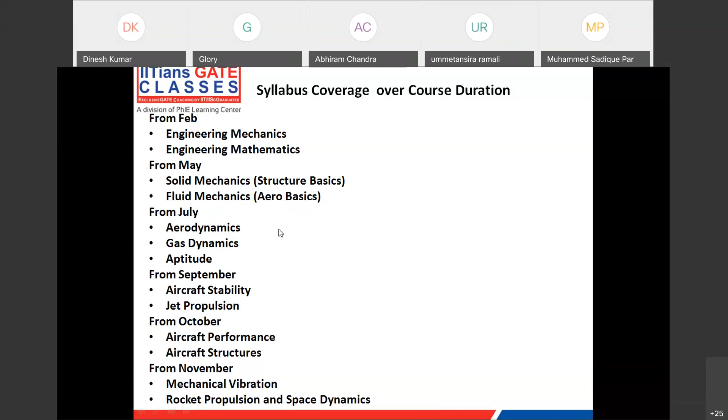Yeah, so these are the links for our sample work. We have shared these links multiple times with you guys. You can go through all these links, like our sample material, assignments, sample online exam, sample videos on YouTube. We have many good videos on YouTube, like the opportunities or future of aero students, the importance of GATE aerospace for aerospace or aeronautical engineering students, subject-related videos, previous year's paper solution videos, or topper talks on GATE preparation. There are many good videos, so you can watch and get motivated.

In terms of the test schedule, see, test is like this. Suppose we are teaching engineering mechanics. There are two parts in engineering mechanics: one is statics and one is dynamics. So we have exams for both. It is not hard and fast that you sit at that particular time and write. Topic-wise exams you can write once due, anytime, anywhere. But it is always good you complete them early when exams are due. We will notify when exams are due. Is it okay, Glory?

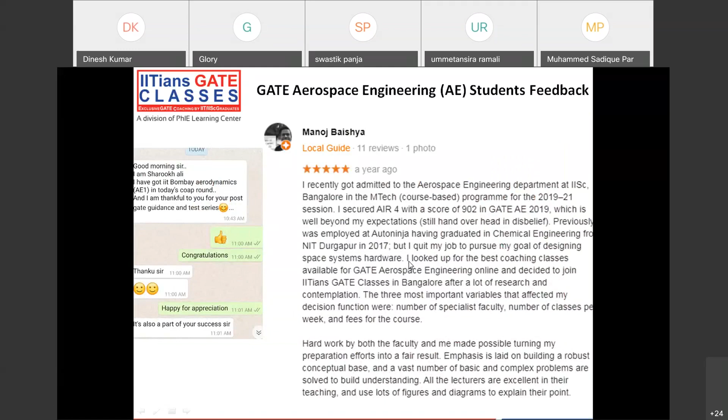Now, these are a few feedbacks from our previous students that we have shared with you guys. You can see the kind of work we provide. So this is Megha Bhardwaj. This feedback is way before she got All India rank 2, right? The result came in 2019 and she provided feedback on 10th December 2018. Before that, she took classes from somewhere else. 1 year she wasted. Now read this, because some institutes claim her result.

But you read, because of the kind of effort we put in mentoring students, it's not about whether you are just our class students or our DLP or test series students. Is it clear, guys? So we do not claim the result of any students unless they are our students and they get support from us. Even many people attended our online mock exam freely. We don't bother; whatever result they get, it is their preparation. We will bother about the results of all our students who have registered and paid. The same thing will be there for your batch as well. Clear, guys?

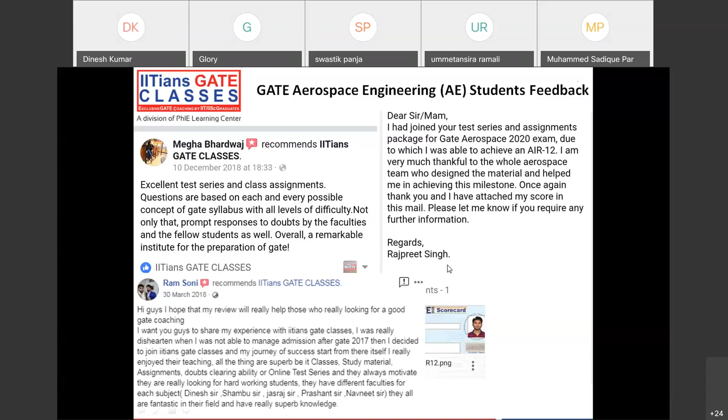So these are a few more feedbacks you guys might have gone through. Yeah, now this is the doubt forum. So you can see someone has inquired. You can see here the doubt posted and the support either by IGC, meaning our faculty, or GATE, meaning the student fraternity. Clear?

So these are further doubts. You can see here, this is for basic fluid thermodynamics. There also we provide very good support. Now you can see this is post-GATE guidance. Once you have a rank, how to use that rank in the best way, we provide complete support for that as well. Is it clear? Yeah, fine.

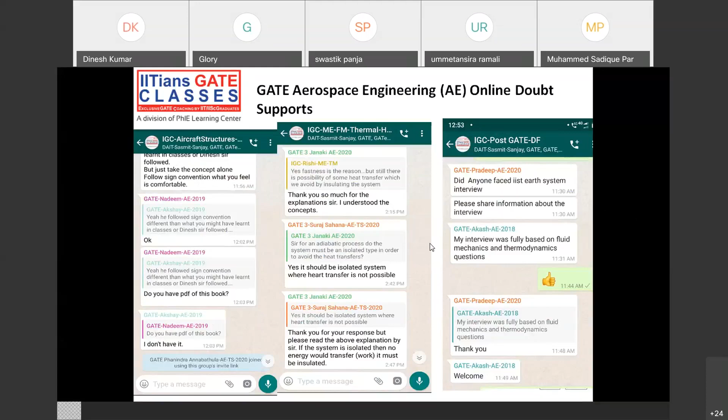Or any topic like mathematics, linear algebra, differential calculus. We are the only institute providing exams in such a systematic manner. If you take gas dynamics, we have exams even for Rayleigh and Fanno flow. We have an exam for CD nozzle. That will make sure you are good in every topic. If you are good in every topic, then the whole syllabus will be easier.

Okay, you of course will be good in the whole syllabus. So after all those topic-wise exams, which should be completed by November by every student, we have subject exams. So for every subject of GATE we have an exam, like aerodynamics, gas dynamics, engineering mathematics, propulsion, like this. And now we are having around 20 subject-wise exams here. Not all the exams are listed. Okay, and then we have 4 module exams and 10 full-length exams.

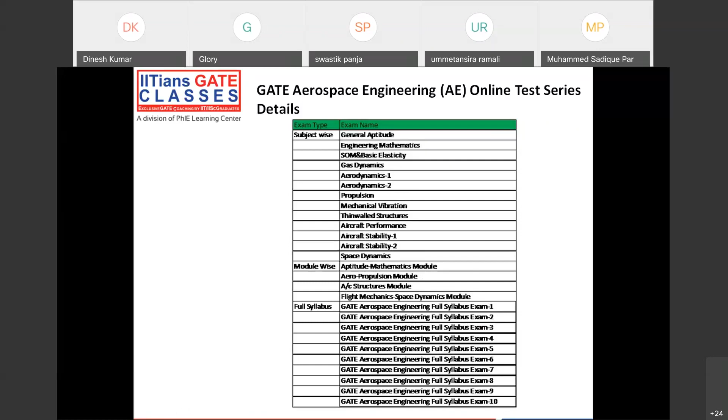And you will find all 3 kinds of questions, which is NAT, MCQ, MSQ. All 3 kinds of questions we put in our exam. And we are very fortunate, GATE 2021, as I told, was exactly like our IGC mock exam.

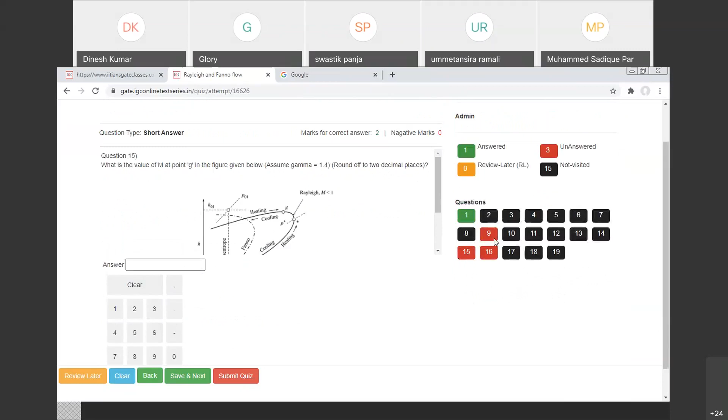suppose this topic is covered, you can see this is MSQ questions, multiple choice, multiple answer. This is the latest GATE pattern questions. This is NAT, short answer. This is again NAT. This is NAT. This is a MSQ. This is MSQ, short answer. So all these questions are there.

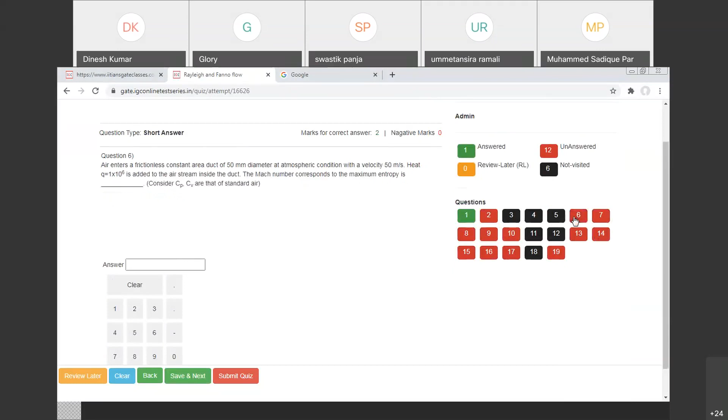You can see short answers. So a lot of numericals are given. This is a MSQ. So like this, different types of questions are given. Here, if you see, the virtual calculator is there, so you can quickly use this like GATE. It is very quick, it is not slow, and it is inbuilt.

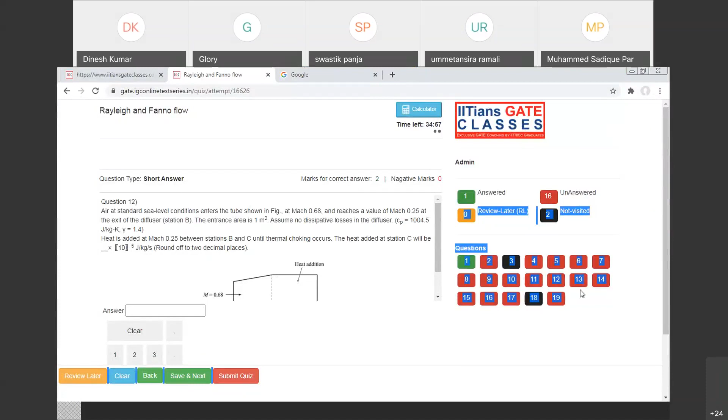You can see here time is running. Time will fly, so that is also important. So all these features of real GATE are taken care of. You guys can tell, I can give the answers.

So what is Abhinav Chandra? What is your name? Abhiram Chandra. So this is like GATE, right? You have written the GATE exam.

So analysis, everything will be shown. Once you submit the exam, in GATE the result takes time, right? But this will not take time. Immediately it will tell. So I have attended two questions which were MSQ. You can see incorrect, but still no negative marking, because for MSQs there is no negative marking. Here you can see what is your rank, who all have attended, how much time you have taken.

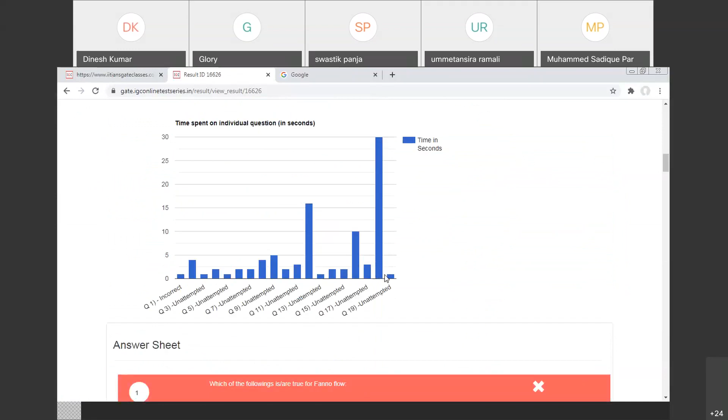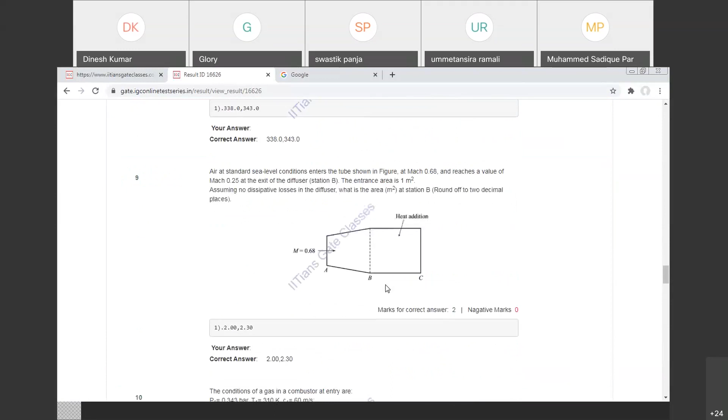So like this. Now when we have subject exams, for the initial few exams we categorize by subject, so you can analyze which subjects you are poor in and which subjects you are good in here in category. But later on, like in your GATE exam, there will be only two categories: one is aptitude and one is core. So we will not categorize into more subjects. So in the initial exams you have to analyze where you are weak and where you are strong.

So here the results are always available, and as I told, in mock test you will find all the mock tests. If you take the full length exams, you can see the 10 full length exams. Clear? Now if you want subject exams, just filter module wise or subject wise. You can see all these subject exams are there. In subject exams and topic wise exams, we don't keep 65 questions. Questions will be sometimes 25, 20, 30, 40, like that. It varies.

We give only a soft copy at the beginning, but for that you have to pay a minimum amount. It will be one time sharing through Google Drive. Every time we will not share. Whatever we teach in online classes, there will be a separate drive where class notes will be kept if it is required. Okay, fine. So this is about the online test series tool.

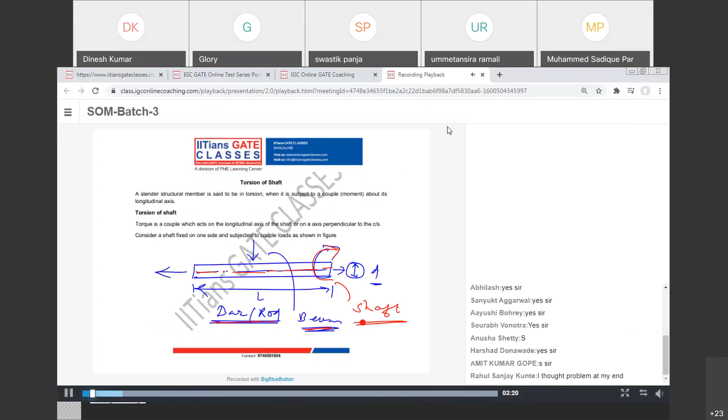What I need to explain? Yeah, I'll tell quickly, then we'll start the demo class. So you guys can see this is how the recording will be there. Okay. Yeah. So this is about IGC platform. I'll close it. Yeah. You are asking something? What you are asking?

In 1 week there will be 2 classes only? No, no. There will be 4 to 5 classes. Abhishek, that's what I was saying about the IP part, like you cannot share credentials with a friend. Okay. You have to use it for yourself. Okay. Because it's online. It should not be like just share with anyone. Otherwise, we will limit a lot. Okay. It should not be misused. Clear?

That is a separate team, IT team. Okay, I don't do it personally. It is shared data from the IT team. Okay, clear? Yeah, I think so. I think I have done from my part, and we'll move to the technical part. Okay, before that, you guys can go through our sample materials and all. All the links are provided. So, Nithin sir, are you there? Yes, sir. So I'll share the presenter with you. Sure.

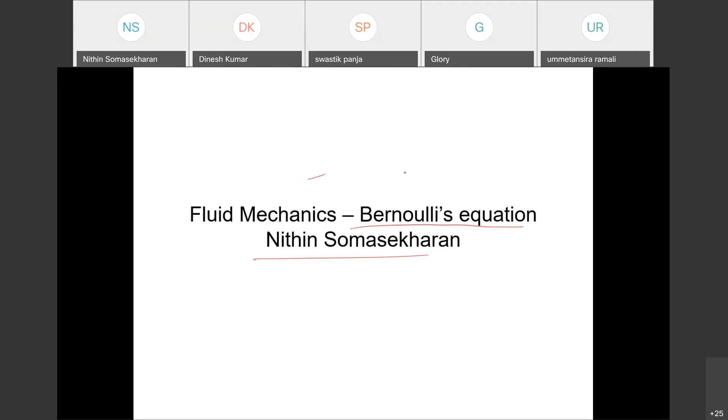So one thing which I want to discuss is just a brief background about what this Bernoulli's equation is, and I'm sure most of you have come across the term Bernoulli's equation, and you would have also seen that it is very much applied, and from a GATE point of view as well, there are a lot of questions you can expect, and every year it repeats.

From one point of view, you might think that it's a really simple equation, and then it's easy marks, and that's pretty much true. Any questions related to the Bernoulli's equation are just easy marks. You have this equation, you understand the question, you apply it. It's just pretty straightforward. So I wanted to use such a simple concept for this demo class, just to give an example to you guys.

So one thing is that it's a special case of the momentum equation, and you guys know that the momentum equation is a law, that is Newton's second law applied to a control volume. So Bernoulli's equation is pretty much a special case of it. What I mean by special case is that when I put some assumptions on top of my momentum equation, which is a law that every fluid flow must follow, I get my Bernoulli's equation.

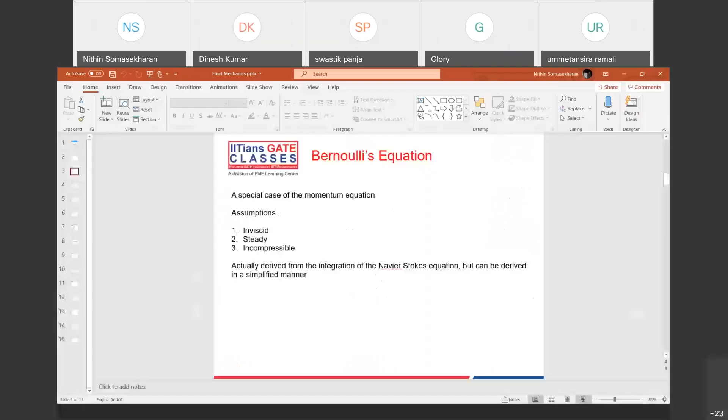All right. Great. So let me start annotating, and if I see like I can erase it.

Great. Okay. So when I talked about the flow being inviscid over here, what I mean is that, I'm not saying that viscosity will have no effect on your flow field, right? As you guys would have heard of, your viscosity can in fact create these boundary layers and things like that. In fact, let's say you have a flow over a flat plate, it can pull down your velocity close to the body to be zero, and then away from the wall to be of some higher value and things like that.

So when I'm saying that the flow is inviscid, or assuming the fluid to be inviscid, I'm saying that I'm going to ignore these effects. I'm going to ignore the effects that my viscosity would bring in. That is, my fluid flow is not going to be retarded because of the presence of the wall, or there is not going to be any rotation in my flow field. Let's say you have a fluid element, and your fluid element is basically getting rotated because of the viscosity and things like that. So none of this is going to happen, or I'm assuming that none of this happens,

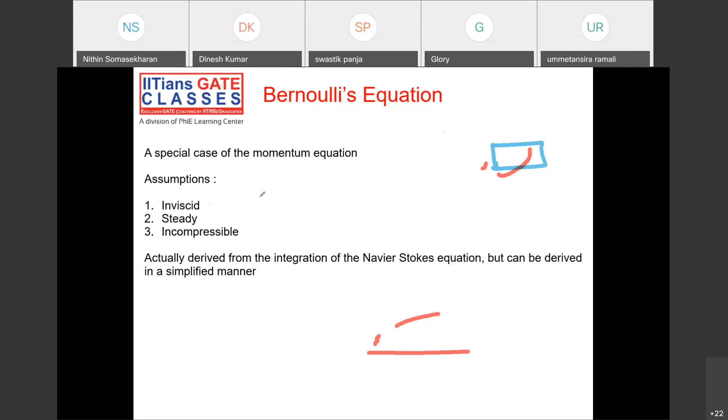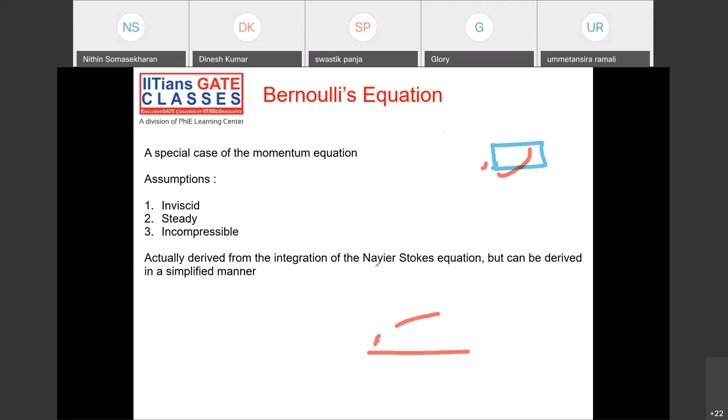in my flow field. So that is basically what the inviscid assumption means, meaning that no effects of viscosity would be considered in my flow field. Viscosity cannot have any effect. Even if there is a wall, there's not going to be any boundary layer, there's not going to be any rotation, nothing like that. It's just going to be plain and simple. All right? Is that clear?

All right. So the next assumption being that, what kind of approach do we use here? So we use an Eulerian kind of approach, not Lagrangian. Whenever we do any derivation from a fluid mechanics point of view, we rarely use the Lagrangian approach, because that is very complicated, in which you have to track each and every particle, which is not that easy. While the Eulerian approach gives you a wider picture, a bigger picture in a much easier sense.

So let me get my chat box out. "So how come we go with Navier-Stokes equation here, sir? Please do not laugh at me." I mean, it's okay. No questions are stupid, so it's fine. You can ask, even if it's a very basic question. It's always entertainable. How come we go with Navier-Stokes equation here?

So we do not go for any Navier-Stokes equation right here. If I go forward in my derivation, you can see that I'm not going to use any Navier-Stokes equation. Absolutely not. We are going to derive it from a much simpler formulation. The Bernoulli's equation can be derived from the Navier-Stokes equation, and that is the right way, or the most mathematically rigorous way. But here in this case, we are not going to do that. We are going to go for a much simpler approach, just for the sake of this demo class.

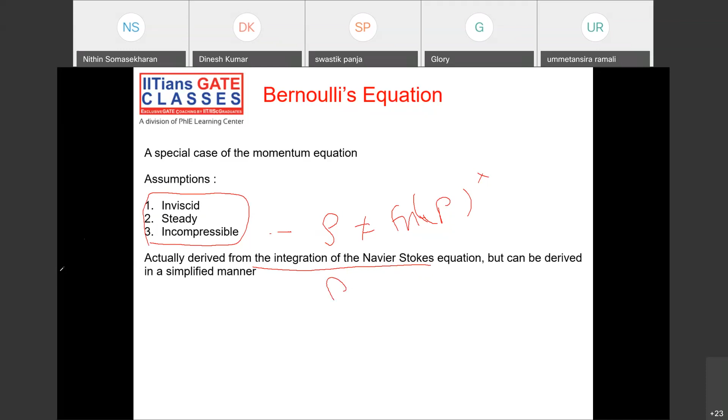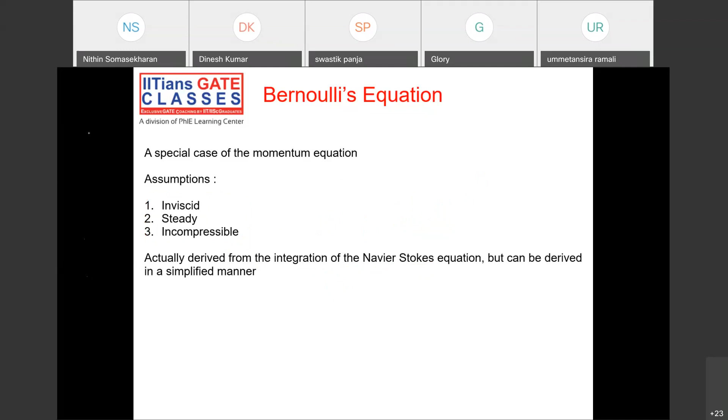Great. So let me move ahead in my presentation. All right. So for this derivation, I'm going to take a streamline in your flow field. You know that a streamline is basically a line that gives you the direction of your fluid flow. So you have your streamline right here, and it gives you the direction of your velocity vector in your flow field. It's one of the basic concepts, right? A streamline.

And what I'm going to do is take a control volume around it, which is basically nothing but the Eulerian approach that I had mentioned, that you would assume a control volume while doing something in the Eulerian space, right? So I'm going to assume that there is a control volume around this, and it's a cylindrical control volume, as you can see in the figure. We are going to apply our equations of motion on the cylindrical control volume, and finally we're going to derive Bernoulli's equation.

So keep in mind we have a streamline, which gives you the direction of the flow, and on top of the streamline I'm going to assume that there is a cylindrical control volume. And control volumes, as you would know, are certain small volumes that you assign in your flow field so that you can derive some of your laws. Any questions?

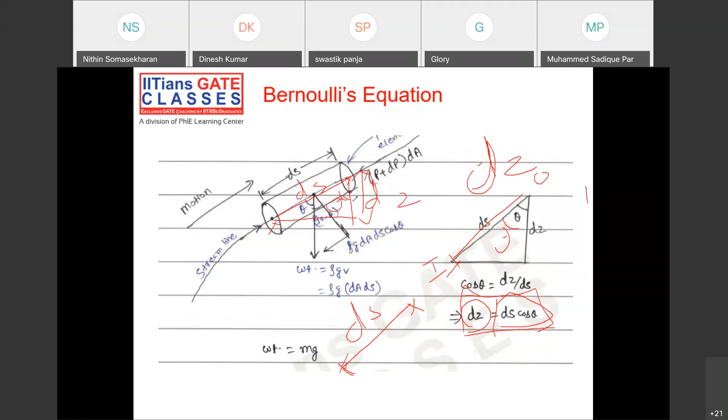So the vertical height difference dz between the inlet and the outlet. So this is the inlet, this is the outlet. So this is a vertical height difference, vertical in the sense with respect to the direction of gravity. And if this is ds and this is theta, so dz from the triangle, you can see that it's ds times cos theta.

All right, is everything clear? Shall I move ahead, or are there some questions that you guys have which need to be answered? Any questions? Are things clear? Am I going at the right pace so that you guys can understand? I know that some of you guys might have your concepts rusty. So am I going at the right pace, guys? Great. All right. So let me move ahead to my next slide.

DZ and W are in the same direction. Yep. DZ and W are in the same direction. Yep. All right. So let me move to the next slide. So here is where the mathematical beauty happens. So now we are going to sum up all these forces that I have identified, right?

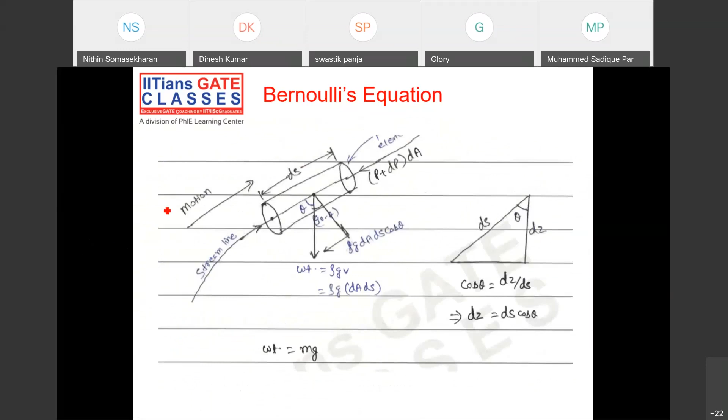I have PdA. Oh, sorry. Let me go back. Let me see if I'm able to annotate. Oh, this is crazy. Sorry guys for this technical hiccup, it's just crazy. Let's see. All right. Oh no, again. It's fine. Let me see. Okay. So let me try to make this right, guys. For some reason, I'm not able to annotate all of a sudden. Okay, nope. All right, so we are back, guys. Sorry for that hiccup.

So now what we are going to do is sum up all these forces. So assuming that the direction of the streamline is the positive direction, we have identified some forces, right? PdA at one end, and here P plus dP times dA in this area. And then you have the component of your weight, that is rho g dA ds cos theta. So we are going to sum up all these forces.

So PdA, is it in the positive direction or the negative direction, guys, according to the convention that I just mentioned? PdA, the pressure force acting at the inlet. Positive. All right. And P plus dP times dA, since it is against the direction of the streamline, is going to be negative. So here you can see PdA positive, and this is negative of P plus dP times dA. So you have negative PdA, negative dPdA. So it's in the opposite direction, guys.

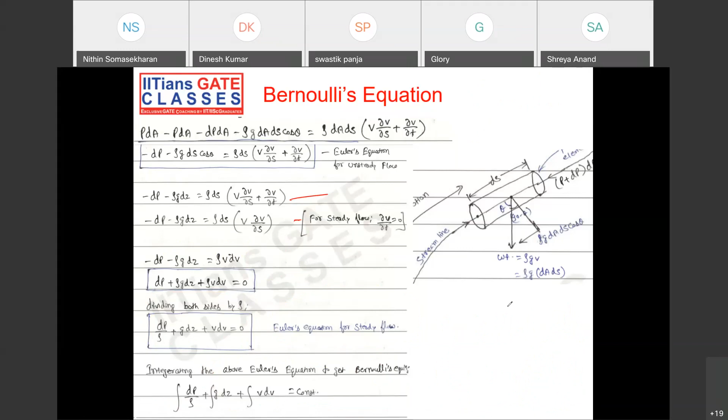Use your usual integration; it's like integral of x dx, so that's v squared/2, right? So in the end, we get our Bernoulli's equation. Let me open the next slide. The expression I just showed you: p/rho plus gz plus v squared/2 is equal to constant, which is the final form

of the Bernoulli's equation. Each term represents energy per unit mass. p/rho is pressure energy per unit mass. gz is mgz, potential energy divided by mass, since z is the vertical coordinate. Half mv squared is kinetic energy, so per unit mass it's kinetic energy per unit mass. Pressure, potential and kinetic energy per unit mass sum to a constant for a flow that is steady, incompressible and inviscid. This is our powerful and simple Bernoulli's equation.

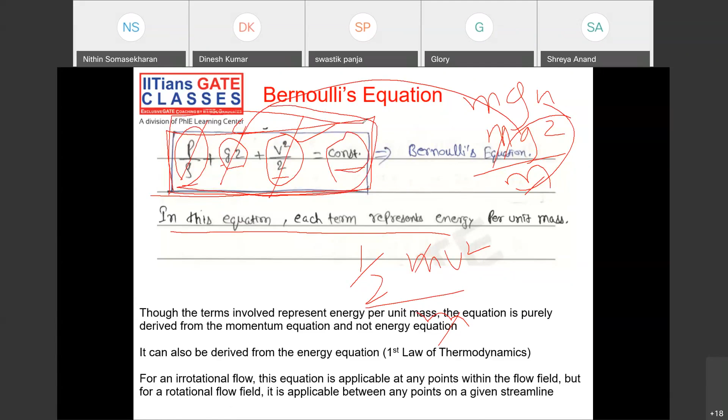All right. Any questions, anybody? Any questions? All right. A few comments, and please feel free to bring up any.

Keep in mind, this is not the right way to derive Bernoulli's equation. It just does the job for us. The right derivation is much more rigorous, has a lot of mathematics involved, and you would derive it from the Navier-Stokes equation.

And that is up for a detailed lecture that we always do with the class students. So this is just to give a context on how we teach.

All right, and another important aspect to keep in mind here is that though these guys represent some kind of energy per unit mass, this equation is purely derived from the momentum equation and not an energy equation. So you should never think of the Bernoulli's equation as an energy kind of equation. Though it represents some form of energy, it's not necessarily that it can only be derived from the energy equation. And as I mentioned, you can also derive the same from your first law of thermodynamics, that is your steady state energy equation for that matter.

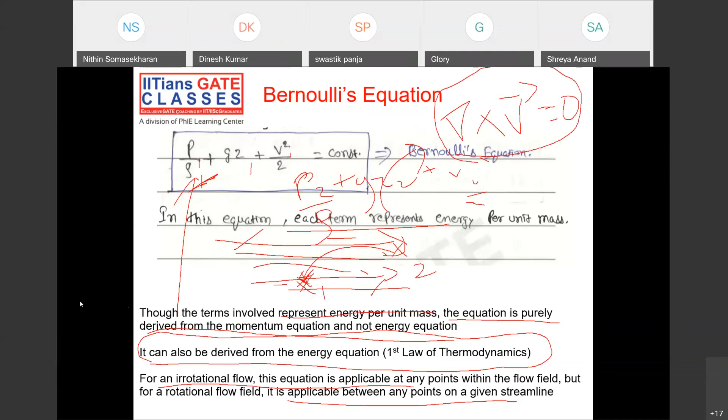So I can apply Bernoulli's equation between point 1 and point 2, and these points 1 and 2 can be located anywhere in my flow field. It can be here and here, here and here, anywhere. Doesn't really matter. And this is only for a flow field where this condition is true: your flow field is irrotational. That is, your vorticity is zero at every point.

But if it is a rotational flow field, your Bernoulli equation is still usable, but only at any 2 points on a streamline. Let's say you have streamlines of a flow field given by this. So I can apply it between any 2 points on a streamline, point 1 and point 2. Let's say I have points 3 and 4 here. I can use Bernoulli's equation between these 2 points. I cannot use Bernoulli's equation between point 1 and 3 if it is a rotational flow field. All right. So this is one important aspect that you guys need to keep in mind when you deal with Bernoulli's equation.

All right. Are those details clear? Any questions, anybody?

All right. So is Dinesh sir online? Sir, I'm there. Yes, sir. So do we have time, sir? You can take up one question. Okay, sir. All right. Sure. But try to wind up quickly, 5 minutes. Sure, sir. Then we'll have a break. Yeah, sure.

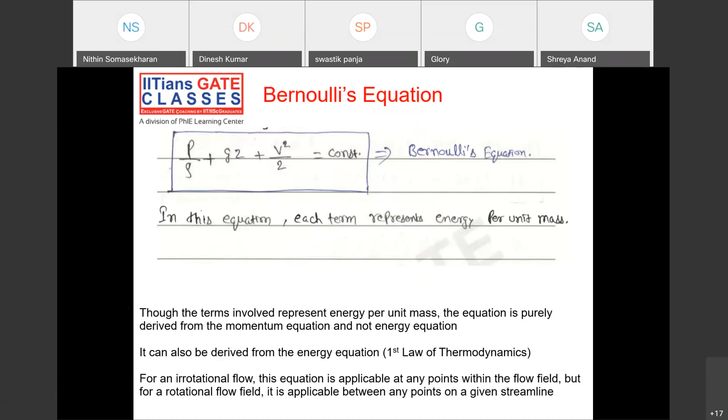Sure, sir. So let me move to a previous year GATE question to demonstrate the same. And this is a very simple question. And you guys would already know that the Bernoulli's equation can be applied to a pitot tube. A pitot static probe is nothing but something which you typically use to measure the velocity of your flow field.

That is, let's say you have a flow field here, and you immerse this pitot tube in this flow field, and you have ports on your pitot tube that measure the static pressure, P static, and ports that measure the total pressure, P naught. So you know that the Bernoulli's equation can be applied in such scenarios as well. So P naught will be nothing but static pressure plus rho V square by 2. That is, if I take 2 points over here, let's say I take a point inside this stagnation, the place where your flow field is going to be decelerated to zero velocity.

So we know that the velocity here is going to be zero with some pressure, let's say P naught, which is nothing but your total pressure. And you have these static ports which measure the static pressure, which I call PS, and the velocity over here is nothing but the velocity with which your flow is coming in, V infinity. So I can definitely apply my Bernoulli's equation between these 2 points in the flow field, as long as my flow field is irrotational.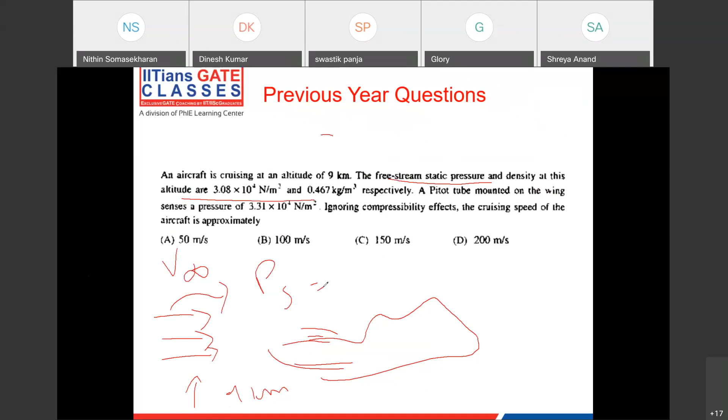The free stream static pressure and density at this altitude are given. So the static pressure of the air at this altitude is 3.08 into 10 power 4 Pascal. For the density, usually we represent any property of the free stream, the incoming flow which is undisturbed, with a notation of infinity.

So P infinity is nothing but the pressure of your free stream, given as 3.08 10 power 4, and rho infinity, the density of the free stream, is given to be 0.467 kg per meter cube. And a pitot tube mounted on the wing senses a pressure of 3.31 10 power 4. We know that the pitot tube measures nothing but the total pressure, the P naught, which I mentioned in the previous slide.

The total pressure is the pressure that your sensor will detect if the flow has been brought to rest, if the velocity is brought to 0, and that is 3.31 10 power 4. Now the question is, ignoring compressibility effects, what is the cruising speed? We need to find V infinity. Keep in mind this point, ignoring compressibility effects.

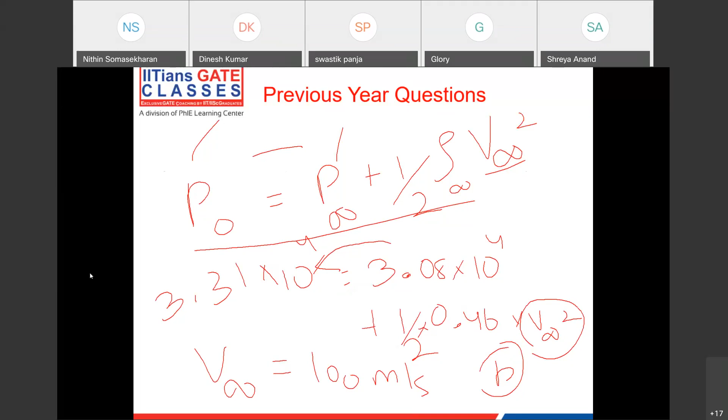And one thing which I want to reiterate: they told me that you can ignore the compressibility effects. If I were to consider the compressibility effects, I definitely can't use Bernoulli's equation. I will have to use the gas dynamics equations. You might be aware of P naught by P is equal to 1 plus gamma minus 1 by 2 M infinity square, whole power gamma by gamma minus 1, and things like that.

So whenever they ask you to consider the compressibility effects, you have to go with the gas dynamics formulas. And if you go by gas dynamics formulas, your V infinity will be much different from what we calculated here. Just because they told me I can ignore the compressibility effects, I went with Bernoulli's equation and did this quick calculation. So keep this in mind. This is usually a place where people make a lot of mistakes.

It's very easy to ignore this intrinsic detail, but make sure you have this concept in mind: I can only apply Bernoulli's equation in this particular form, P by rho plus gZ plus V square by 2, if I'm ignoring the compressibility effects, or let's say my flow is incompressible. If compressibility effects are to be taken care of, then we need to deal with it in a different way. All right. So that is one easy problem I wanted to share with you, and an interesting detail that can be very much overlooked.

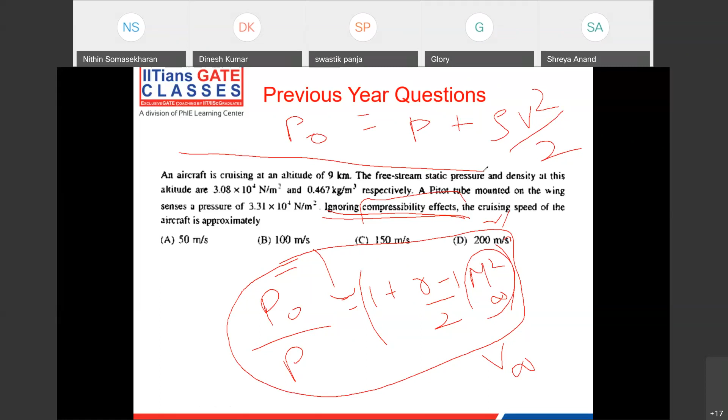So any questions here before I conclude? Any questions before I conclude?

All right. So this is pretty much the format in which we conduct the class, at least for aerodynamics: we talk about the derivation, the theory, any intrinsic details, the actual physics involved, and then we do some problems related to it, mostly previous year GATE problems, and then any other questions you might have. And I hope I was able to give you a sense of what you can expect in our classes.

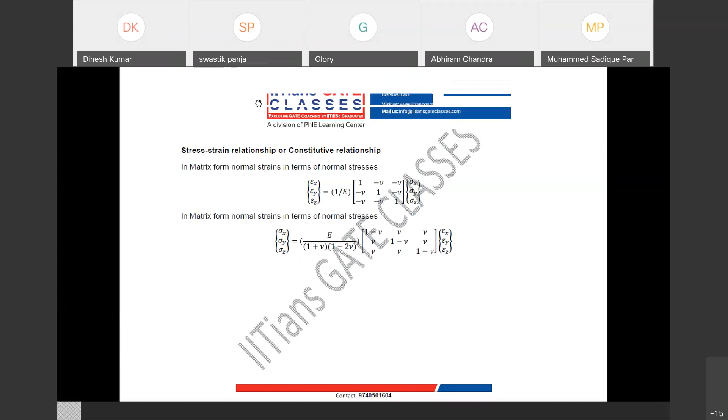Okay, so let's start with a simple topic: stress strain relationship. How many of you are aware about the stress strain relationship, guys? All of you know Hooke's law. What is Hooke's law, guys? Yes, stress is proportional to strain, right? Like sigma is proportional to epsilon.

But where is it applicable, guys? It is for 1D loading. Am I correct? From here we find sigma is equal to E times epsilon, right? So what is E here, guys? We are talking about the stress-strain relationship for isotropic material, because from this simple concept they have asked questions many times. Yes, Young's modulus. It's known as Young's modulus or modulus of elasticity. But as I said, Hooke's law is applicable only for 1D loading.

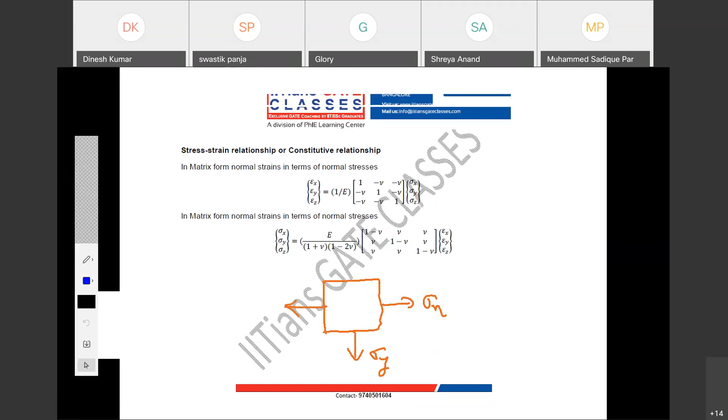Now suppose you have two-dimensional or three-dimensional loading. Then tell me, can we apply Hooke's law? Can I say my stress is directly proportional to strain? Anyone? Abhiram Chandra. No, you cannot, right? I will take one two-dimensional case. Suppose I have one plate subjected to stresses sigma x and sigma y. So it is a two-dimensional stress system. Now in this case, tell me, guys, what will be your strain?

I want, suppose, epsilon x. Will it be sigma x upon E? From Hooke's law, this is what your strain should be. But is it the case? Anyone? Yes or no? No, it is not the case. My strain will be sigma x by E minus nu times sigma y by E. So there is one additional term, which is due to my stress in the y direction causing strain in the x direction. Due to what? Poisson effect. Is it clear?

Due to the Poisson effect, I have one additional strain in the x direction due to loading in the y direction. Now tell me, guys, why is it negative? Why is it not positive? Can you understand physically? When I apply sigma x, it will get extended, so strain is developed. Now sigma y will oppose this extension, meaning contraction. So your strain is reduced when sigma y is present. That's why you see a negative sign here. Is this point clear?

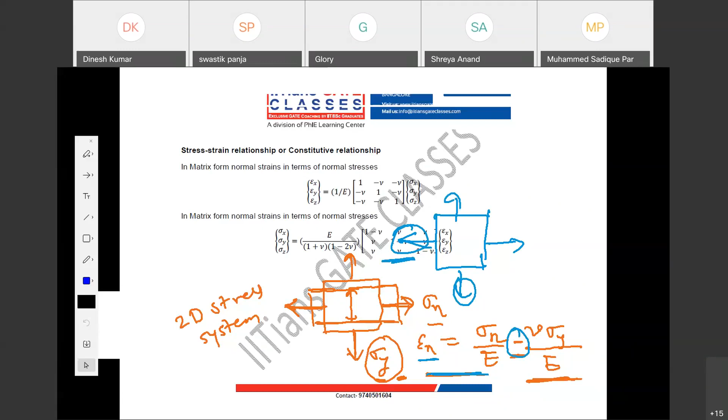So physically also we can understand: when a plate is subjected to stress in two directions, the strain in one particular direction will be less than if it were subjected to 1D loading, because this stress is restricting motion in the x direction. That is our physical understanding of why the negative sign is present. So this is how we derive the stress-strain relationship for a 2D stress system. This is your epsilon x. Now what is your epsilon y? My epsilon y will be sigma y by E minus nu times sigma x by E. Is it clear?

Is it clear or not, guys? Quickly tell. See, guys, be interactive, okay? We are online, but still interaction must be there, okay? That's how we enjoy, okay?

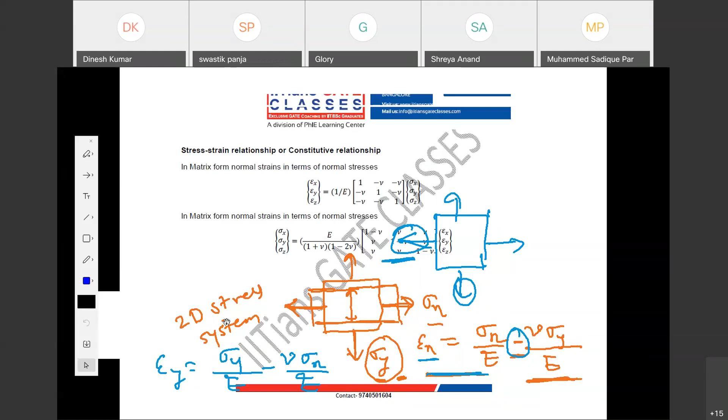So good. Now, this I talked about two-dimensional stress system. Now, suppose my stress system or my loading is three-dimensional, right? If my loading is three-dimensional, that means I have sigma x, I have sigma y, and I have sigma z. How can I visualize it? I take a cuboid. So suppose here you have sigma x, here you have sigma y, and on this face you have sigma z, right? Is it clear? The loading part, is it clear, guys? You have one stress in x direction, sigma x, I can write here. Then you have sigma z and you have sigma y.

Right. So in this case, what will be your epsilon x? It will be sigma x by E. Then due to Poisson effect, you have minus nu sigma y by E minus nu times sigma z by E. Is it clear? Is it clear or not, guys? Then similarly, I can write epsilon y, which is what? Sigma y by E minus nu times sigma x by E minus nu sigma z by E, and then I can write epsilon z, which will be what? Sigma z by E minus nu sigma x by E minus nu sigma y by E. Is it clear?

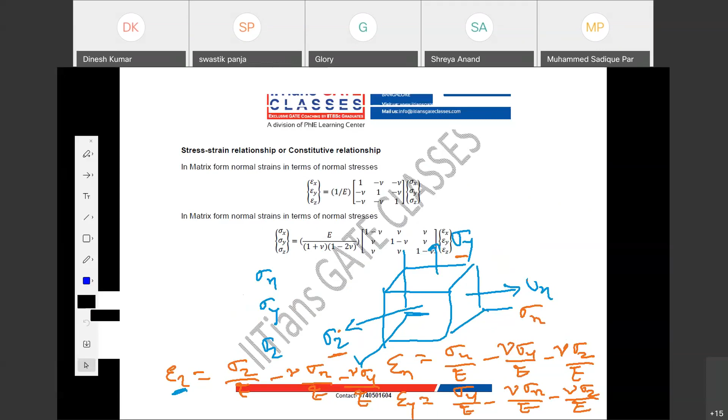So I have three strain terms, right? Epsilon x, epsilon y, epsilon z. I can write these three equations in a matrix form. Is it clear? 1 by E can be taken out. So it is what? 1, minus nu, minus nu; minus nu, 1, minus nu; minus nu, minus nu, 1. Is it clear? Nu or mu is what? Poisson's ratio. So this form is easy to remember. In matrix form, we can easily remember. And in this form itself, in GATE 2020, they asked a question. We will solve that question.

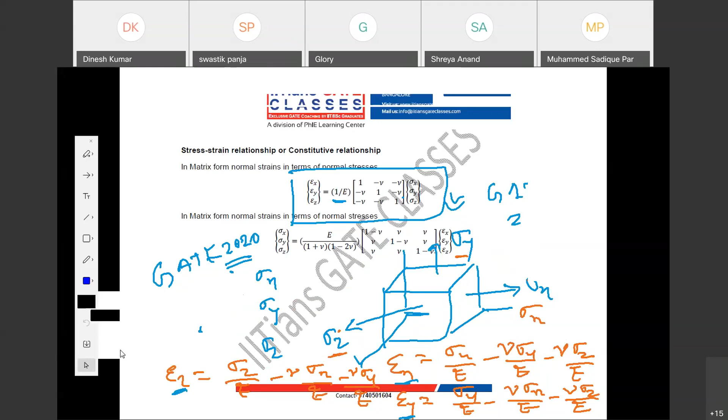Clear? Okay. Now, guys, here what I have done, I have written my strain in terms of stresses. You can write stress in terms of strain by taking the inverse of this matrix. So both the forms are very important to remember for the GATE exam. In this, it is 1 by E. Here, my constant is E upon 1 plus nu into 1 minus 2 nu. Then it can be remembered because again, it's a symmetric matrix: 1 minus nu, nu, nu; nu, 1 minus nu, nu, like that. Okay, so these are the two equations for stress-strain relationship and strain-stress relationship.

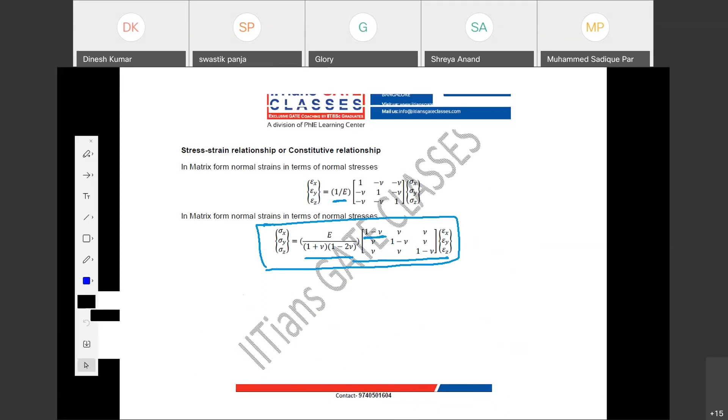So based on this, we have two concepts. One is plane stress problem, and one is plane strain problem. So we have seen questions from these two concepts in previous years' papers, as well as questions directly from this form. Okay, so we will take up those questions.

Before that, if someone asks, why do we study strength of materials or aircraft structures? Anyone? Why do we study this subject in our aerospace engineering? Can anyone answer? What is the significance or importance of this subject? To me, guys, it is very simple. Your aerodynamics sir will give me loads. Surface loads and body loads.

Broadly, we can categorize loads in two forms. One is body forces and one is surface forces. So body forces are what? Forces due to gravity, or forces due to inertia. What are surface forces? You have force due to pressure or you have shear stresses, right? Those are surface forces. So what I have to do as a structural engineer, I need to analyze for applied loads whether my structure is safe or not, or my design is satisfying my goal or not.

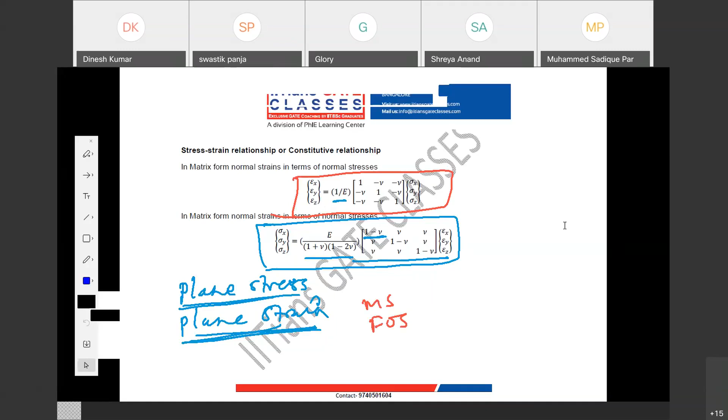Am I correct? Right? Your CFD team will give us loads, and as a structural engineer, for every component of the aircraft, I need to check something called margin. Have you guys heard about margin? There is something called margin of safety, factor of safety, right? So MS, factor of safety FOS, or RF, reserve factor. Have you guys heard about these three? So my job is to find any of these three. All three mean the same. Different companies use different names. Some use margin of safety, some use factor of safety, some use RF. Okay. So what is margin of safety? Relation between margin of safety and factor of safety? Anyone?

Anyone have come across these terms? See, margin of safety is nothing but your FOS minus 1. Factor of safety minus 1 is what? Margin of safety. Yeah, you are correct, Jay Verma. And FOS has to be always greater than 1, or your reserve factor should be always greater than 1. But your margin of safety has to be greater than 0.

Okay, so this is the difference. Different companies use different notation. So the whole idea to study this subject is to always find margins. Clear? Always check your structure is safe. How do we find safe? We compare our maximum applied loads or maximum stresses. You guys might have heard about von Mises stress and principal stress. So we compare this quantity against what? Material allowable. And we find the margins. Clear?

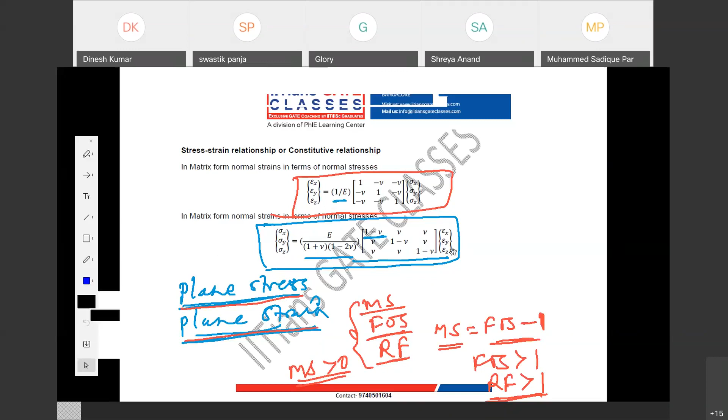Now here we are discussing stress-strain relationship or strain-stress relationship. So I told from this there are two conditions: one is a plane stress problem and another is plane strain problem. One more thing I want to tell here, guys, we have seen these relations are between normal stresses and normal strain. But there are shear stresses and shear strain also, right? So what is the relation between shear stresses and shear strain?

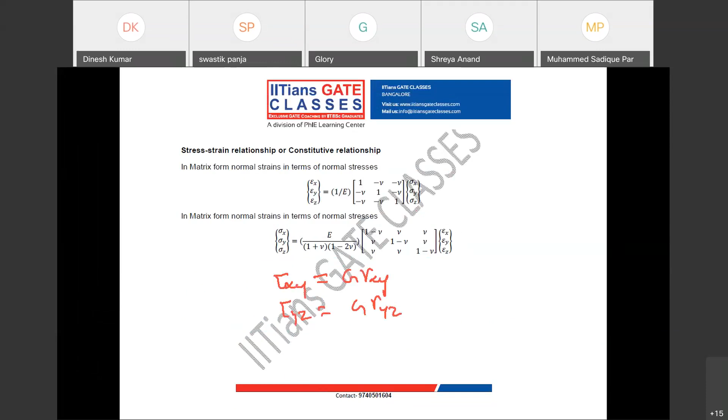Anyone? What is your tau xy? It is G into gamma xy. What is your tau yz? It is G into gamma yz. What is your tau zx? It will be G into gamma zx. Now what is the G, guys, here? Yes, it's the shear modulus, and we are going to derive this relation between shear stresses and shear strain when we start our class.

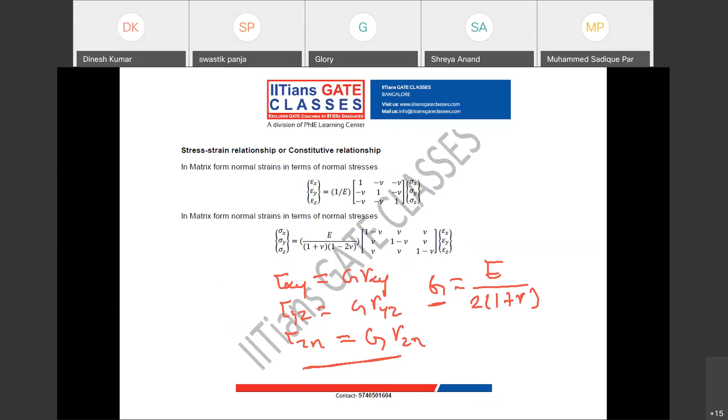But what is the relation between G and E? G is E upon 2 into 1 plus nu. Do you guys know this relation? G equal to E upon 2 into 1 plus nu. This again we will derive when we start our real class. Here my idea was just to give you the essence and see how GATE questions are. Now, based on this, I will solve one previous year's question.

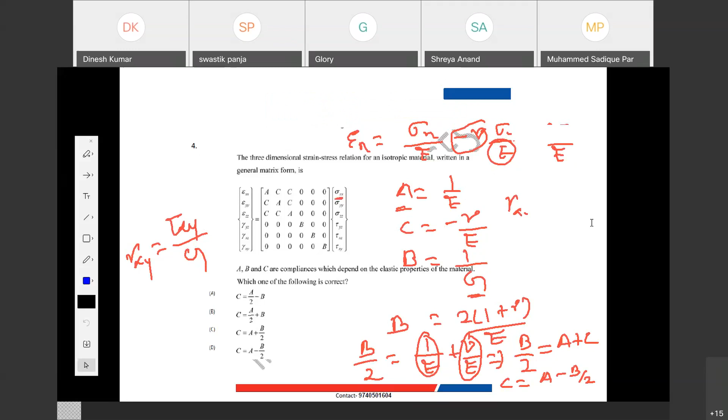Everyone, please tell quickly what is the answer. So is it clear? Was it tough question? If you have clear understanding of the concepts, it's the easiest question. And it came for how many marks? 2 marks. Now tell me guys, was it tough to secure these 2 marks? Was it tough to secure 2 marks? And it's very interesting, right?

What, I need to explain B? Okay, Shreya. B, right? What is gamma xy? It is tau xy by G. Now you see this matrix. What will be gamma yz? It will be B times tau yz. What is gamma xy? B times tau xy. Then tell me what is the B? Shreya? B is 1 by G, right? Is it clear now?

Clear. Now we know what is the G. G is E upon 2 into 1 plus nu. So is it clear how to solve this question in a simplest way? You just need to understand this matrix form, right? This matrix form we already know; these are the relations between strain and stresses. Is it clear? Yes or no? Everyone? Okay, fine. So can I move to next concept?

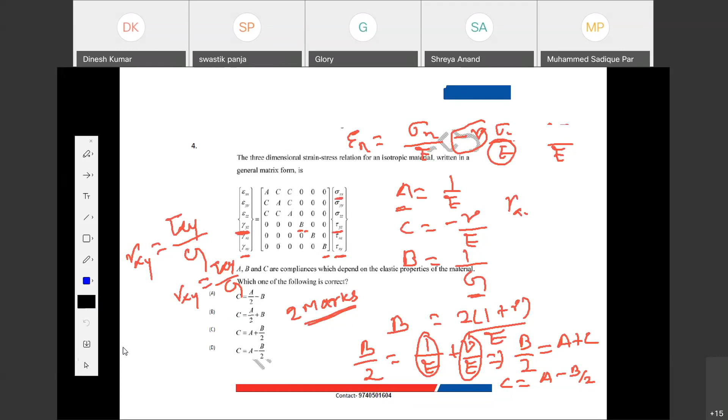Right. So let's go back to stress strain relationship. And I told the application of stress strain relationship we use in plane stress problem. So can anyone tell me what is the plane stress problem? Anyone? No. A 2D problem can be plane stress also, it can be plane strain also. We have to be very specific about plane stress problem. So plane stress problem means what? You can have 3 directions, right?

X, Y and Z. If my stresses in Z direction are 0, what all stresses you can have in Z direction? One is sigma Z, then you can have tau xz and tau yz. If all 3 are 0, then it is known as plane stress problem in what? XY plane. Clear? Because in this case you have only non-zero stresses in the XY plane. So this is known as plane stress problem in XY plane. Is my voice clear? Okay, so is this clear, what is the plane stress problem?

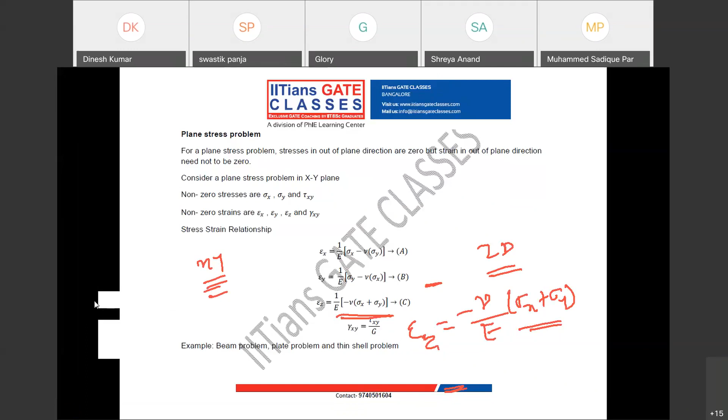Okay. Now, what is the application of plane stress problem? There are many applications. One is our thin walled structure, aircraft structure. Then beam problem, your thin shell, spherical shell, cylindrical shells, all these are plane stress problems. Now, once you know the plane stress problem, next concept is plane strain problem. So what is the plane strain problem, guys? Tell me.

Anyone? In plane strain problem, what will happen? You will not have strain in perpendicular plane. Suppose this is my xy plane, then my epsilon z, gamma yz, gamma xz will be what? 0. But your sigma z may not be 0. Is it clear? Your strain in perpendicular direction will be 0, but stress may not be 0. How? Again, it is from stress-strain relationship.

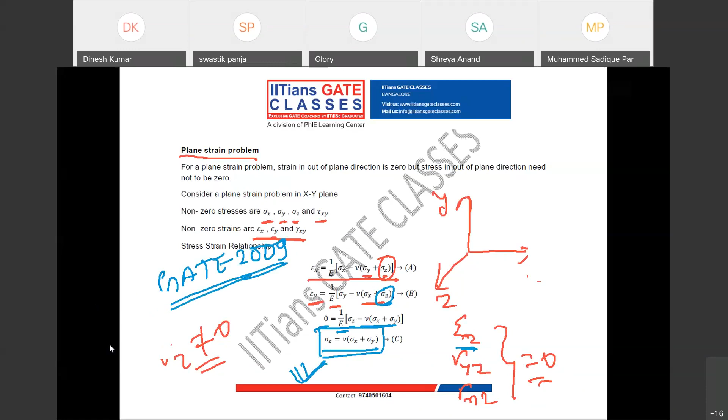Now again, this is one of the GATE questions and it came in GATE 2009, the year in which I appeared. Okay, so let's see that question, guys. Can you see this question? Read it and give me the answer. What is the answer, guys?

See, in plane stress problem, stresses will be 0 in perpendicular direction. What is your doubt, Abhiram? Is it the same in plane stress problem? Stress in perpendicular may not be 0? I am asking what you don't know. Plane stress problem itself says your stresses in perpendicular direction are 0. That is the condition. Is it clear? The definition of plane stress itself says your stresses in out of plane directions are 0. But you can have non-zero strain, which is epsilon z, if your plane is xy plane. Is it clear, Abhiram?

Yes, B is the answer. Okay, I will explain this question. Here plane strain condition is satisfied. So guys, for plane strain condition we know sigma z is non-zero. A cannot be the answer. C is not the answer because we know sigma z was nu times sigma x plus sigma y. D cannot be the answer, right? So B is the answer. Why B is the answer?

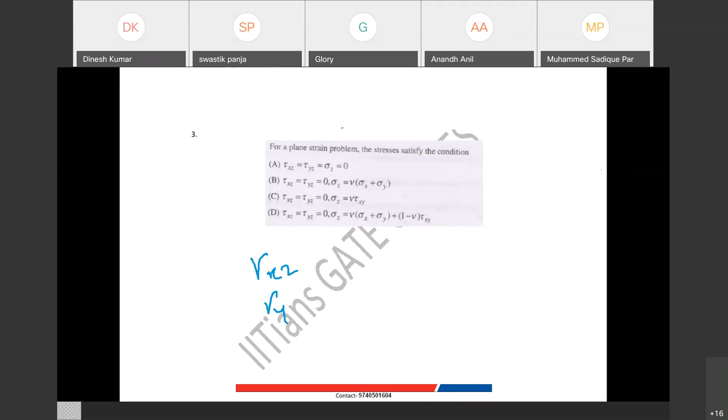Because we know gamma xz and gamma yz are 0, right? So tau xz will be 0 and tau yz will also be 0, and we already know sigma z is nu times sigma x plus sigma y. Is it clear? This is for XY plane. Is this question clear, everyone? So this is how in GATE they ask questions. Was it tough? I don't think it was a tough question. If you are clear with concepts, it's quite easy. Fine, guys?

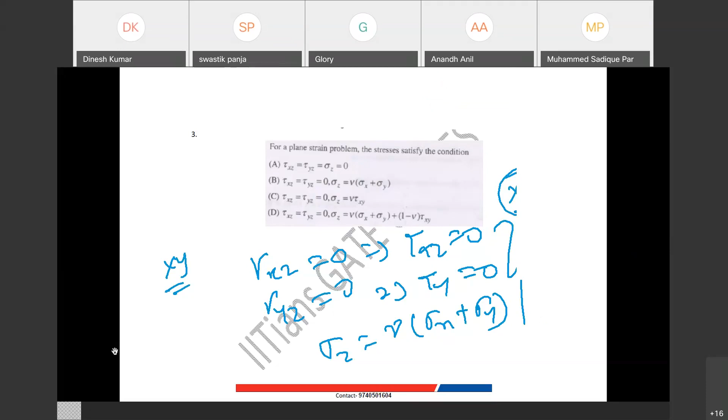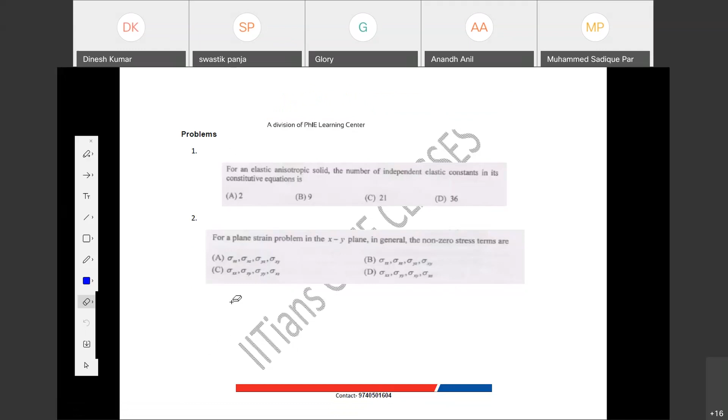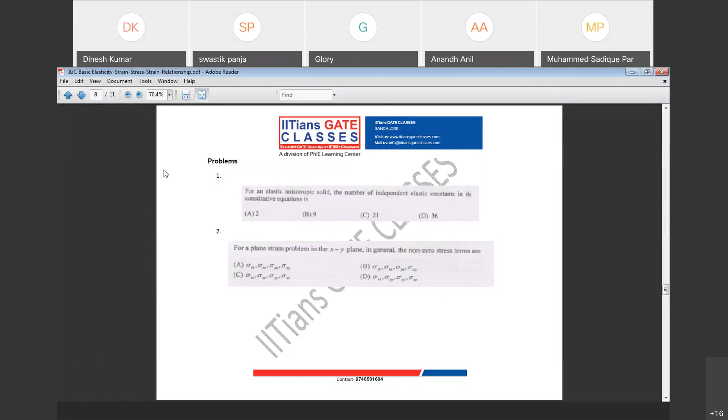Okay, let me zoom this. One moment. Yeah, tell me the answer, guys. So what are the non-zero stresses for plane strain problem in XY plane? Abhiram, do you think sigma xz is non-zero? How is C the answer?

Guys, forget the answers. Tell me with your concept, what are the non-zero stresses for plane strain problem in XY plane? It is sigma XX, sigma YY, sigma ZZ, and tau XY, or you can say sigma XY. Is it clear? Yes or no?

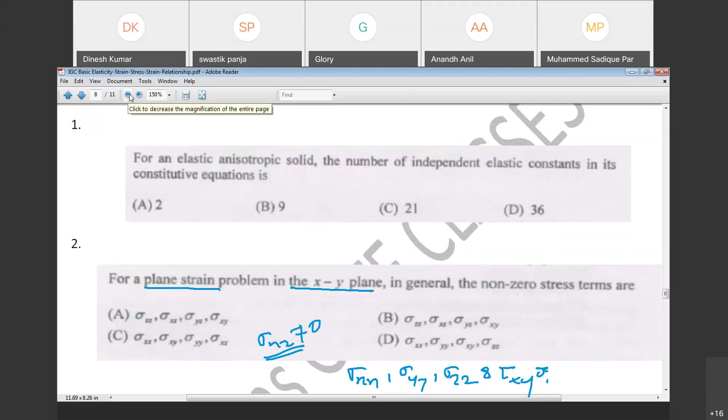Clear? Right. So what is the answer? Abhiram, what is the answer? D is the answer. You can see here sigma XX, sigma YY, sigma XY, and sigma ZZ. Now here, instead of tau, they have written sigma. That also I will explain. Either you can write tau or sigma, that doesn't matter. What matters? This prefix I and J. If I equal to J, then it is normal stress. If I is not equal to J, then it is shear stress.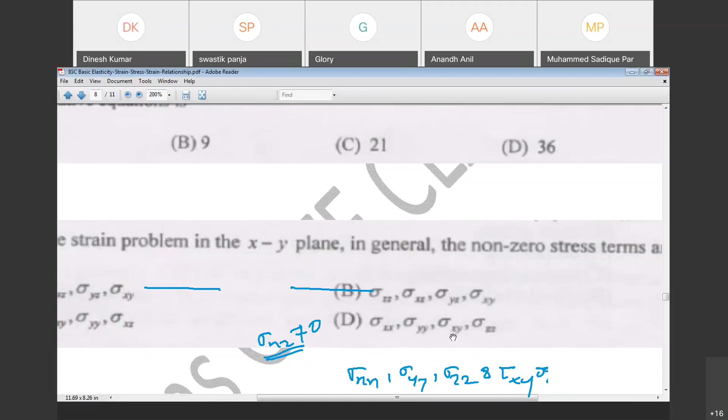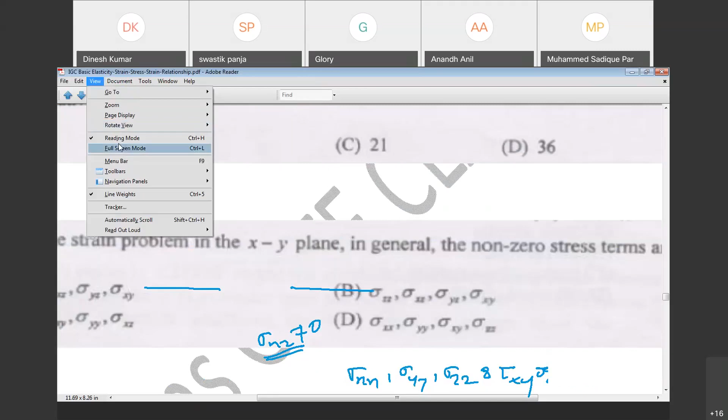So what is the answer? Finally, what is the answer, guys? What is the answer? The answer is D. What is the answer, guys? Answer is D.

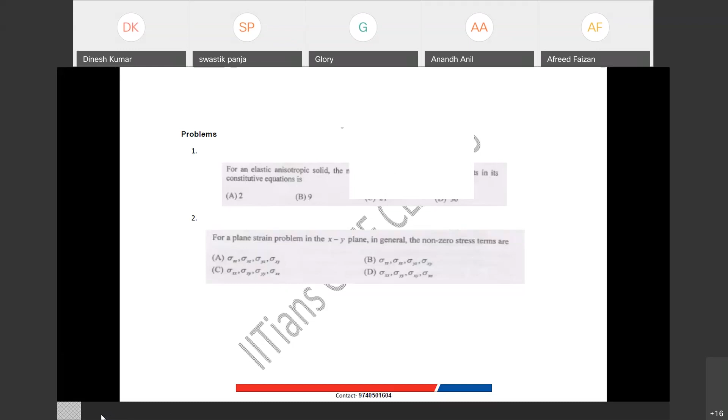But see, guys, tool should not be the big concern. The quality is most important for us. When we started these classes, we were writing with mouse. So it was a big challenge. Nothing was there, lockdown was there, no shops were open. So I used to write with mouse, the only reason being students should not get their studies hampered. That was the situation. Now we have everything. So come to that IGC tool. I'll share.

Okay. So let me start a class. So this is the IGC platform. Here on the right, all the participants will be there. This is the public chat, here you can write like you were doing. Now this is the tool. Here we have all options to write. Since I am writing through mouse, it is a bit tough, but when I use pens or digital pad, it is quite fast. Sir, do all the faculty use the pen? Yeah, all the faculties have digital pad or iPad.

Nobody teaches through mouse. We have done this when nothing was available. Right? April month when lockdown was there. Even Kirana shops were tough to find. So we have gone through all the experience.

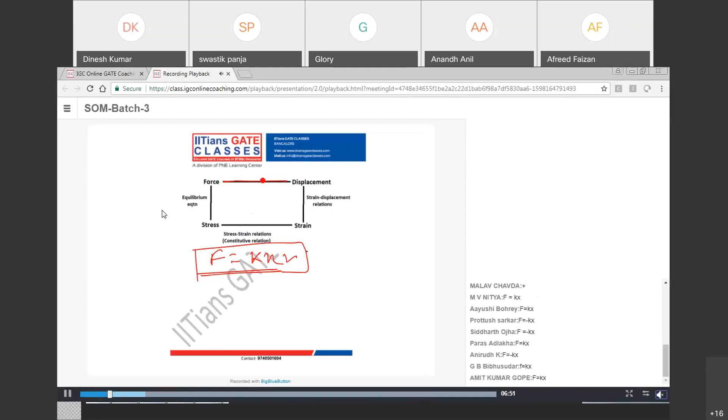So is it clear, guys? Now I will show you Nitin sir's recording itself. Let me go to the server recording. Nitin sir has taken subjects like aircraft stability. Hemraj sir, Navneet sir, Karthik sir, Utpal sir. Where is Nitin sir? Ram Shankar, Utpal sir, Karthik sir, Navneet sir, Deepak sir, Raghuram Sambhu sir, Jassa sir. Yeah, Nitin sir.

No, he has not taken the fluid class. Then why is the fluid class there for him? Let me check by searching this way. Just give me one moment, I will show his recording also. Machine design. Yeah, aerodynamics by Nitin sir. So his recordings are there. Let's open any random recording.

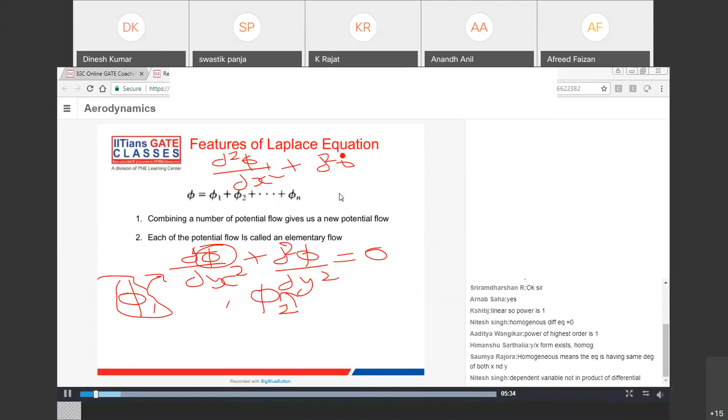So, one doubt, sir. Okay. See, the IGC tool is a much more potent tool. Clear? Okay, fine. So, any other doubt?

Any other concern or doubt about our course or anything? You can write in the chat box. How many batches are there? Usually we take admission 3 times: Feb, May and July. Batch 1 and batch 2 will mostly be together, and then batch 3. But May is not sure this year, so you'll have Feb and July. Any other concern?

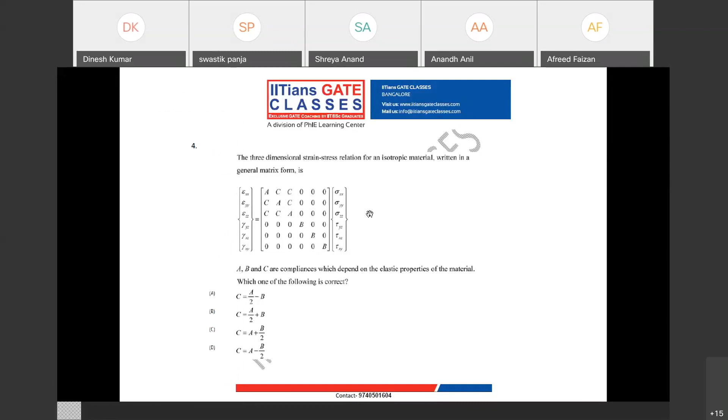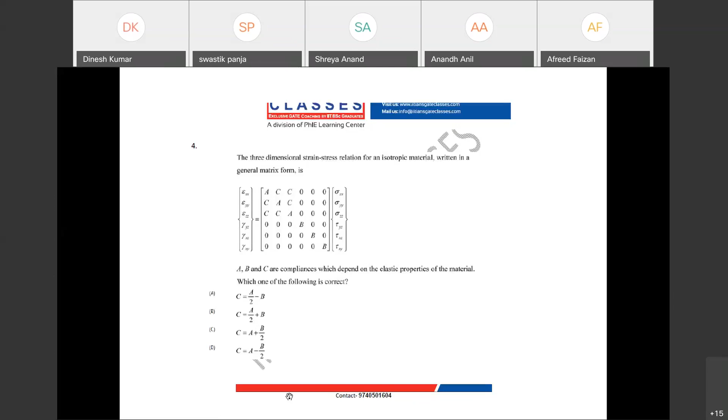One more thing: I would like to show you the IGC drive, where you find all the materials. So I'll show you that as well. Let me open that. Yes guys, I'll share the last thing, then we will wind up. So you can see here.